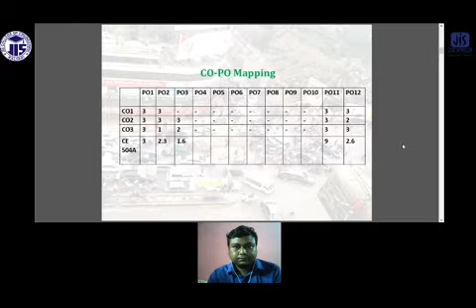Hello student, today we will discuss the road users and the vehicle characteristics. This is another topic under traffic engineering. The module is the introduction of traffic engineering, and under this is road users and vehicle characteristics. If you remember, we discussed a few things about this briefly in my last classes, the introduction to traffic engineering, where we discussed in a nutshell what traffic engineering is. We learned from the previous lecture the various components included in traffic engineering, and we will discuss each component in the coming classes. First, if you remember, we talked about road users and vehicle characteristics, and today's topic of discussion is road users and vehicle characteristics.

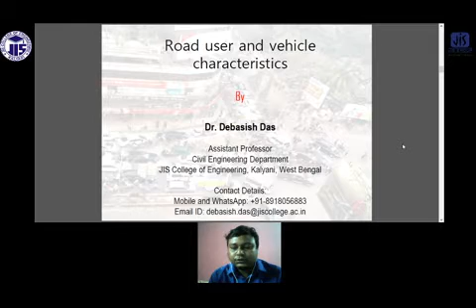So what is transportation? First, we need to know what is transportation. Now we are going to some deep analysis, some deep study. In my last classes we discussed it briefly, a nutshell of traffic engineering. Now when discussing a particular topic or lecture component of traffic engineering, we need to focus in a more deep manner, and for that we first need to know what is transportation.

From the term transportation itself we have an idea. There is goods transportation, there is passenger transportation. So transportation is basically, the general meaning is the movement of a human being or any object from one position or point to another point. This is the simplest definition of transportation: movement of a human being or any object from one position to another position is known as transportation.

Now what is a transportation system? It is not that one person or one object can easily move from one position to another position on its own. There must be some organization, some system. There are various types. A whole team, a chain, is there in between each component for movement of that particular object or person from one position to another position.

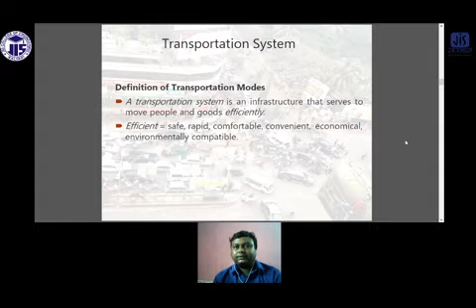So all these things - as I said, there should be reliability, cost is one parameter, safety is a parameter. You will not take a risk if you see the history of a particular agency - say out of 10 assignments they had 3 accidents - no, I will not go for that agency. I will go for agencies with the least accident rate, least damage rate, or zero damage rate - that is the reliability. So this combination of all the steps is known as the transportation system.

So the major transportation systems are, as you all know: land transportation, air transportation, water transportation, and pipeline transportation.

Inland, the highway and the railway are the two most significantly used transportation systems worldwide due to easy availability. I cannot ask the airport authority to halt in front of my house, but I can tell my nearest taxi, auto, or toto driver to take me to the nearest railway or bus station. That is door to door service, only possible with highway or railway. It takes just 5 to 7 minutes of walking to reach my nearest station where we can take the rail. This is the most available, most economic, and most efficient transportation system widely used not only in India but all over the world.

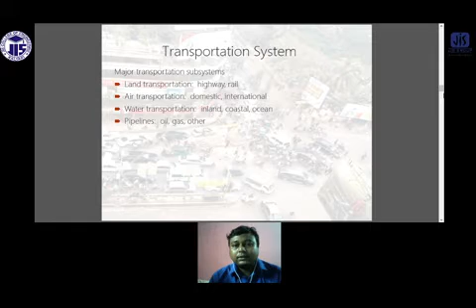Next is air transportation. There are domestic and international flights, but very few people can afford it due to the expensive tickets. Water transportation - inland, coastal, and ocean - is preferred by very few passengers unless it is the exclusive way to reach a destination, because it takes a huge time compared to air, road, or rail transportation. But if water is the only way of transportation, then I am compelled to take it. The last one is pipeline transportation, by which we transport oil, gas, or other liquid things.

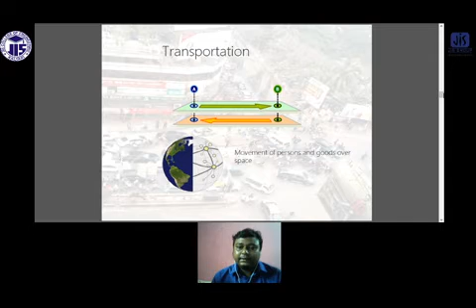So this transportation system, the movement of persons or goods over spaces, is basically known - I am repeating this from the beginning of these classes - as the study of traffic engineering.

Traffic engineering is a comparatively new branch of engineering and has grown with the increase in traffic in recent years. Very few institutes in India offer transportation engineering specialization for higher studies. It's not new in the sense of being introduced 2 or 5 years back - it was introduced long ago, but its popularity compared to other specializations is not up to that level. That is why we say it is a new branch of engineering that has grown with the increase in traffic in recent years.

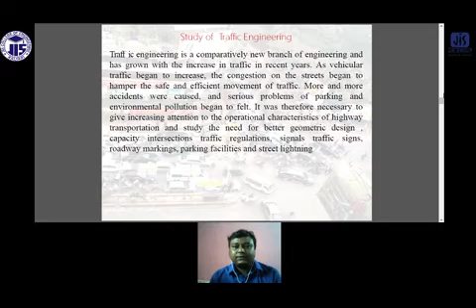As vehicular traffic began to increase, congestion on the street began to hamper safe and efficient movement of traffic. More and more accidents were caused, and serious problems of parking and environmental pollution began to be felt. It was therefore necessary to give increasing attention to the operational characteristics of highway transportation and study the need for better geometric design, capacity, intersection traffic regulation, signal traffic signs, roadway marking, parking facilities, and street lighting. This is the introduction of traffic engineering.

Traffic engineering is the branch of engineering which deals with the planning and geometric design of streets and highways, and operating traffic systems to achieve safe, economical, convenient, and efficient movement of persons and goods. The basic objective of traffic engineering is to achieve efficient, free, rapid flow of traffic with the least number of traffic accidents.

The main concern is that accidents should be as few as possible, and the transportation system that users find should be cheaper, safer, and rapid.

The factors affecting traffic are the road users, the vehicles, the roadway, and the environment. Road users mean us, the human beings who are the road users. Vehicles are the various types of modes traveling on the road. The roadway means the geometric features of the roadway - the width of the road, the length of the road, the shoulder, the curvature - these are a few features of the roadway.

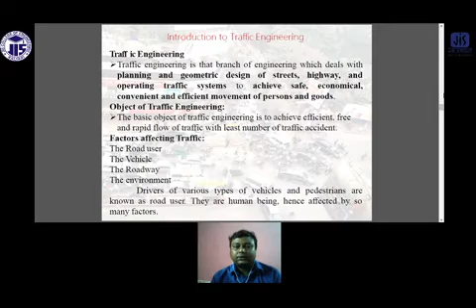And the environment which we cannot control or predict. This is totally uncertain. So the drivers of the various types of vehicles and pedestrians are known as road users. They are human beings, hence affected by so many factors. So traffic characteristics, the first and most important scientific study, is the study of traffic characteristics. Traffic can be classified into classes: the road users and the vehicular traffic.

We have discussed this in brief in the last classes. Today we will discuss more details about the road users and the vehicular traffic. So when we are talking about the road user characteristics, it is a human being performing different roles in the traffic, which are the most important elements of the traffic, and so we have to study their characteristics and behavior. Various roles of humans are such as the driver, pedestrian and cyclist, etc.

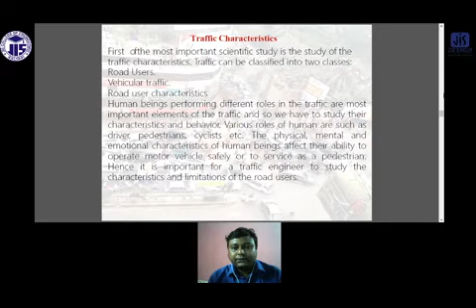The physical, mental and emotional characteristics of a human being affect their ability to operate a motor vehicle safely, or to serve as a pedestrian. Hence, it is important for a traffic engineer to study the characteristics and limitations of the road users. So these are the road user characteristics.

It may be permanent or it may be temporary. When we talk about permanent, it includes physical characteristics, psychological characteristics, and mental characteristics. And when we talk about temporary, it includes alcoholic or drug effects, working load, illness, frustration, fatigue, and anger. These come under temporary characteristics. So we are basically concerned about the permanent characteristics.

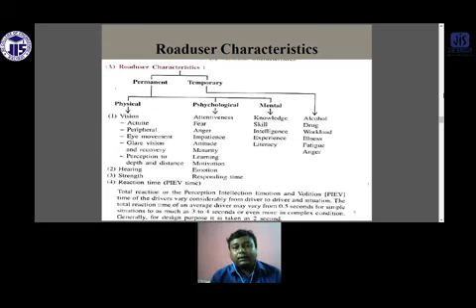So under permanent characteristics, the first thing is physical characteristics. This includes vision, acuity, peripheral vision, eye movement, glare vision and recovery, perception of depth and distance, hearing, strength, reaction time, and the PIEV theory. I have given you the brief about the PIEV theory. The psychological aspect includes attentiveness, fear, anger, impatience, attitude, maturity, learning, motivation, emotion, and responding time. And in mental characteristics: knowledge, skill, intelligence, experience, and literacy.

So if you are talking about traffic characteristics, the various factors which affect the road user characteristics may broadly be classified as physical, mental, psychological, and environmental. So talking about physical, the permanent physical characteristics of the driver are vision, hearing, strength, and general reaction to traffic situations.

Meaning these are not changing from time to time or location to location, because whatever I can hear at point B, I will hear the same thing at point A or point C or point D, at different locations and different times. So it is not that my vision or hearing or strength will be different for different locations or different times. No, these are some permanent physical characteristics which are constant throughout your movement.

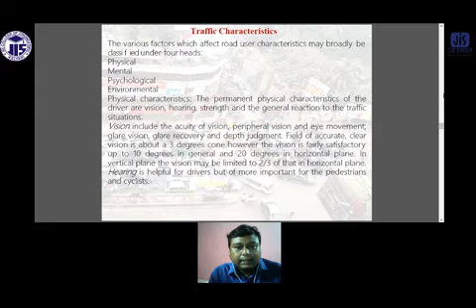Next, vision. Vision includes the acuity of vision, peripheral vision, and eye movement, glare vision, glare recovery, and depth judgment. The field of accurate clear vision is up to a 3-degree cone. However, the vision is fairly satisfactory up to 10 degrees in general, and 20 degrees in the horizontal plane. In the vertical plane, the vision may be limited to two-thirds of the horizontal plane.

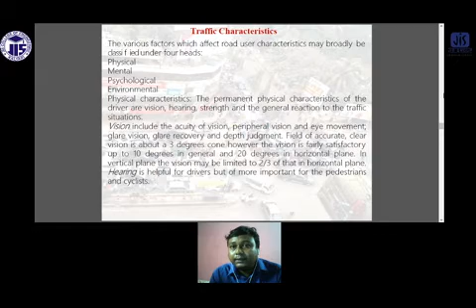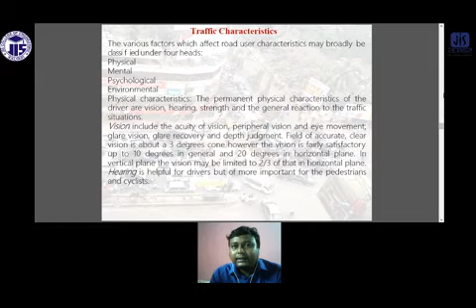And talking about hearing, it is helpful for the driver, but more important for the pedestrian and the cyclist. Yes, because if we are a little bit negligent, using earphones or headphones while moving on the road... if you see the statistics of accidents due to hearing problems, it doesn't mean the person is not able to hear. It is negligence to hear, meaning using an earphone while crossing the road or crossing a train line. So those are the reasons for the hearing problem.

Next, mental characteristics: knowledge, skill, intelligence, experience, and literacy can affect road users' characteristics. Knowledge of vehicle characteristics, traffic behavior, driving practice, rules of the road, and psychology of the road users will be quite useful for safe traffic operation.

The psychological factors affect the reaction of road users to traffic situations to a great extent. Attentiveness, anger, fear, anxiety, phobias, superstitions, and impatience may affect traffic performance to a great extent. So these are some psychological characteristics.

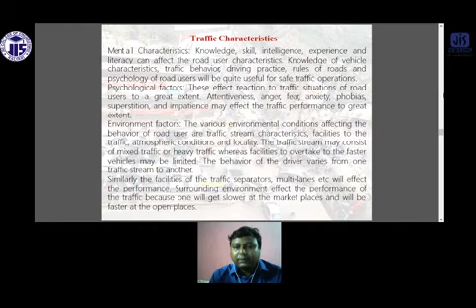Environmental factors, which we cannot predict. The various environmental conditions affecting the behavior of road users are traffic stream characteristics, facilities of traffic, atmospheric conditions, and locality. The traffic stream may consist of mixed traffic or heavy traffic, whereas the facilities to overtake faster vehicles may be limited. Similarly, facilities like traffic separators, multi-lanes, etc., will also have an effect on traffic movement.

So what is PIEV theory? As we discussed in the last class, basically P is for perception, I is for intellection, E is for emotion, and V is for volition. So perception means we have to identify the object.

Intellection means we have to understand the situation. Emotion means we have to control our emotion for taking the decision. And volition time means the final time at which we take some decision, whether we should apply the brake or accelerate.

According to PIEV theory, the total reaction time of the driver is split into parts. This is P, related to our nervous system. Perception means up to this point we need to understand what the object is. Then I and E mean intellection, understanding the situation, and controlling the emotion.

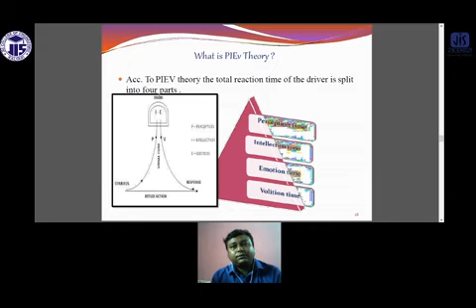These two parameters totally depend on the nervous system of the human being. That is why the emotion and intellection cannot be the same for the same person at different times and different locations. It will vary from person to person, time to time, location to location, because it depends on the nervous system at that particular time. Our nervous system is the most complex system, which does not follow a particular pattern. It may give a different decision for the same phenomena at different locations and different times.

The perception time is the time required for the sensation received by the eyes or the ears to be transmitted to the brain. It depends on the situation of the nervous system at that time. We see an object by eye, or hear some sound by ear, and we send that information to our nervous system. We perceive that there is an object, and send this information to our head, to be transmitted to the brain through the nervous system.

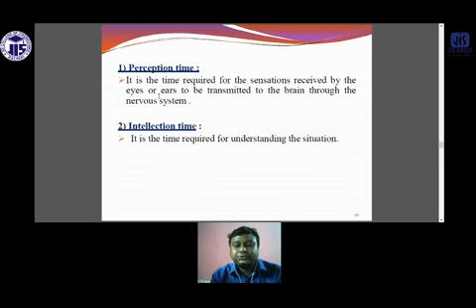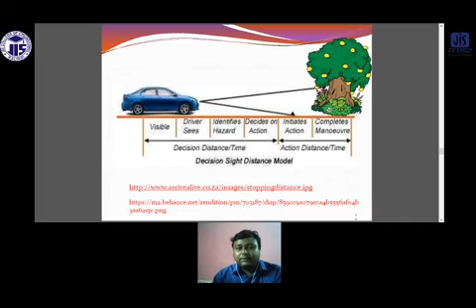Now the intellection time is the time required for understanding the situation, the time for the brain to work and understand it. Suppose there is a tree, and a vehicle is moving - this is the distance decision sight distance model. The vehicle is moving in this direction, it is visible, the driver sees it, identifies the hazard, and a decision is taken. After that, what action is taken? Either apply the brake to divert the route, or stop, investigate, then take a diversion.

The emotion time is the time elapsed during the emotion, sensation and disturbance such as fear, anger, etc. with reference to the situation. Volition time is the time taken for the final action. So the total reaction time of the driver may vary from 0.5 second to 4 seconds, and on a standard it is 2.5 seconds. Now we are talking about the lag distance.

What is this lag distance? Suppose I have seen an object far from my vehicle, and there is a stray dog sleeping on the road. I want to stop my vehicle just in front of that dog or cat. So I apply the brake, but it is not like the vehicle stops at that point itself - it will cover a certain distance before stopping in front of that dog.

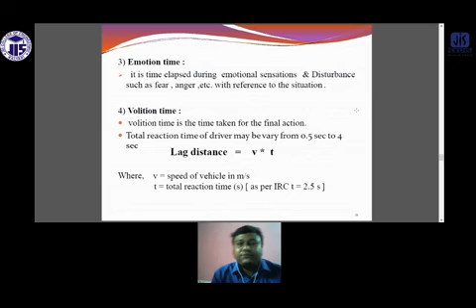This is called the lag distance, meaning how much distance the vehicle traverses before applying the brake. It is represented by V into T, where V is the speed of the vehicle and T is the total reaction time. So the distance traveled by the vehicle during the total reaction time is known as the lag distance.

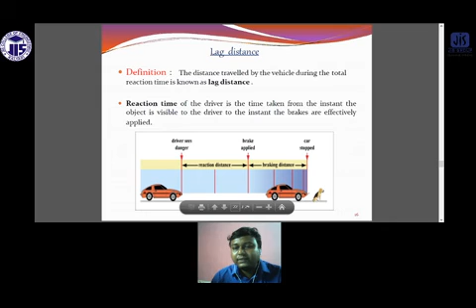The reaction time of the driver is the time taken from the instant the object is visible to the driver to the instant the brakes are effectively applied. Suppose there is a dog and the vehicle is there, and the driver has already seen the dog. The driver wants to apply the brake, and when he applies it, the vehicle has already covered some distance before stopping. This distance is called the lag distance.

Now we talk about vehicle characteristics. As discussed, there are two types: static characteristics and dynamic characteristics. Under static characteristics, which do not change from time to time, we have length, width, height, turning angle, height of the vehicle, driver's seat, headlight, and clearance below the chassis.

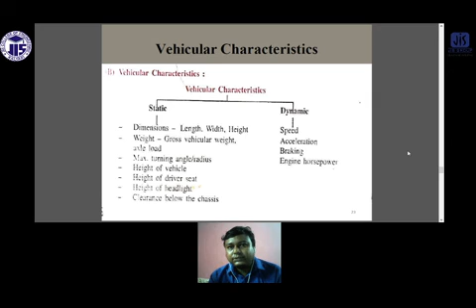These are the specifications of the vehicle which cannot be changed from time to time. The characteristics that do change from time to time are speed, acceleration, braking, and horsepower, which are known as the dynamic vehicular characteristics.

We have now discussed the various characteristics of the road users and traffic. We need this data to do the traffic volume survey and other surveys. So the next question in our mind is, how do we do the traffic survey?

For that, it is important to study the various vehicular characteristics which affect the design and traffic performance, because it is possible to design a road for any vehicle but not for an indefinite vehicle. It will not be economically feasible to keep increasing the geometric standards or pavement thickness from time to time to meet the needs.

We cannot increase the width of the road as and when required. There are a number of restraints and restrictions to increasing the width of a road, so we cannot suddenly change the geometric features. So, based on the existing geometric features, what are the alternative ways to accommodate more vehicles and reduce the accident percentage? That is what we need to study using the traffic survey.

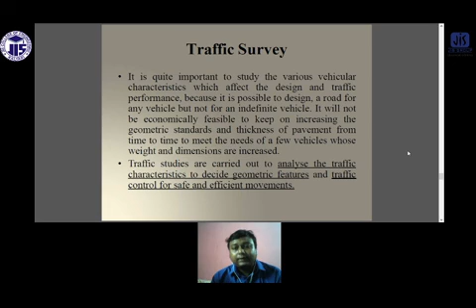Traffic studies analyze traffic characteristics to decide the geometric features and traffic control for safe and efficient movement. Knowledge of these characteristics is necessary for proper geometric design and a traffic control system allowing for safe and smooth operation. Static characteristics include the weight and size of the vehicle, and dynamic characteristics involve the forces that cause the motion of the vehicle.

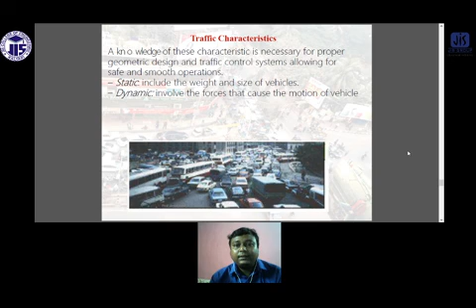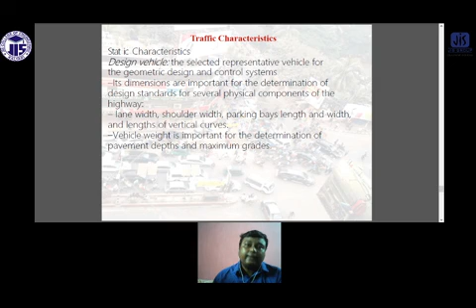Traffic characteristics, when talking about static characteristics, relate to the design vehicles. These are the static characteristics: length, width, height, shoulder, the parking system, the importance in determining pavement depth, and the maximum grade. These are considered under traffic characteristics.

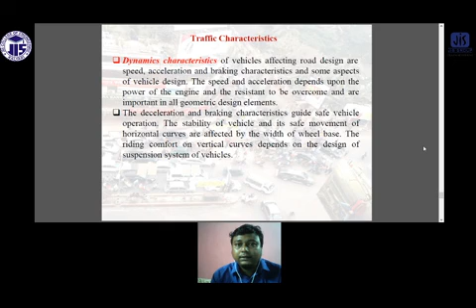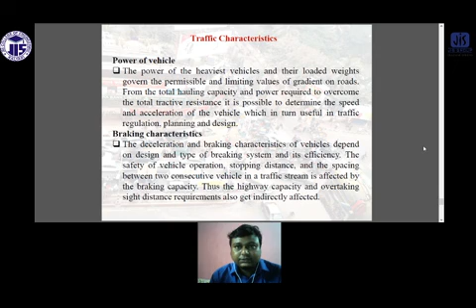Then under traffic characteristics, the dynamic characteristics are braking characteristics, acceleration, and deceleration. Power of the vehicle is also dynamic, and it depends on the loaded weight of the particular vehicle. Braking characteristics mean whether we are applying the brake and whether it is applied properly or not. If not, there will be chances of an accident.

So basically, from this lecture we have learned about the PIEV theory: perception, intellection, emotion, and volition time. What is the lag distance? It means the total distance covered after applying the brake, when we see an object in front of us. We also learned about the static and dynamic characteristics of the road user.

So this is the detail about the various types of characteristics we have learned in this lecture. In the next classes we may discuss another topic of traffic engineering.